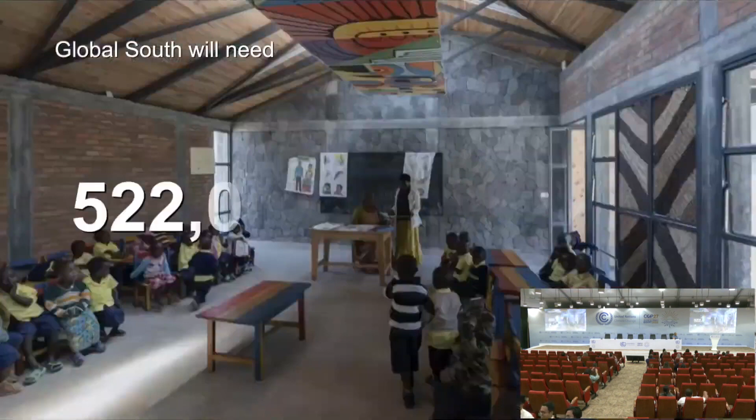In order to meet the needs of this significant population increase, the Global South will need 403 million new housing units, 3.63 million hospital beds, 522,000 new schools, and of course, enough infrastructure to support all of this significant development.

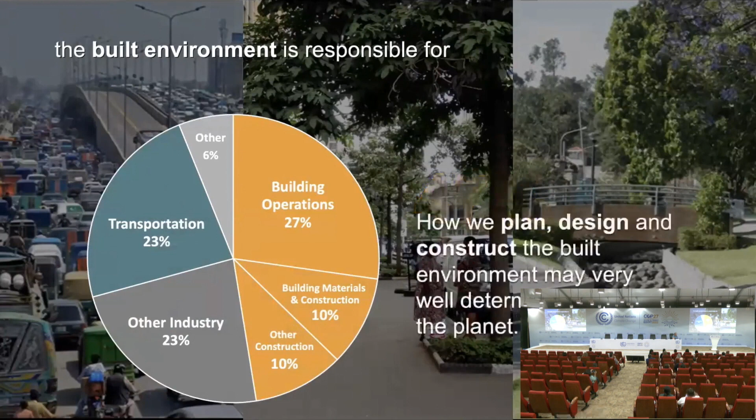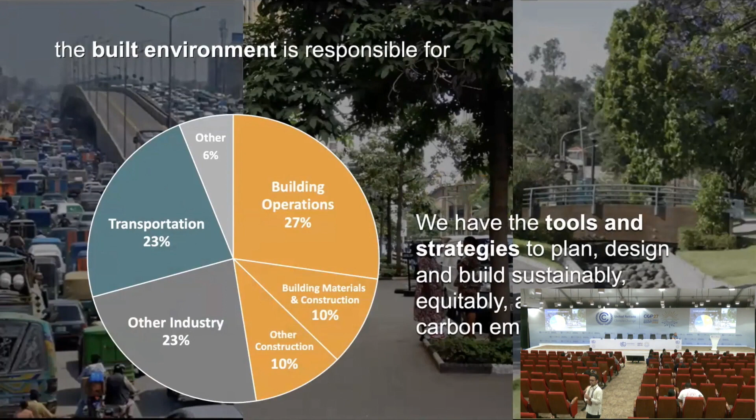Currently, the built environment is responsible for nearly 50% of total global annual emissions. So how we plan, design, and construct the built environment may very well determine the fate of the planet. But we have the tools and strategies to plan, design, and build sustainably, equitably, and with zero carbon emissions today. With that, I'm going to pass it to Ed to tell you how we're going to achieve this.

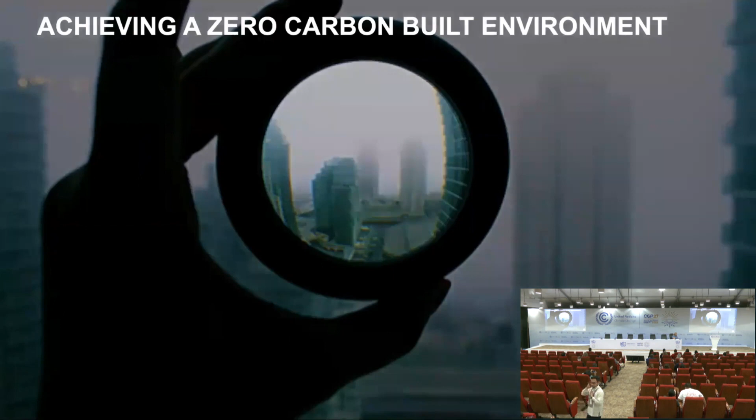That's everything from growth boundaries in urban areas to transit development, to walkable communities, urban agriculture, everything down to the building scale, the form of a building, where you put the glass, how you shade the glass, the materials we make the building out of, the construction types, passive heating, cooling, and daylighting strategies. All of that will get us 70 to 80% of the way to zero carbon.

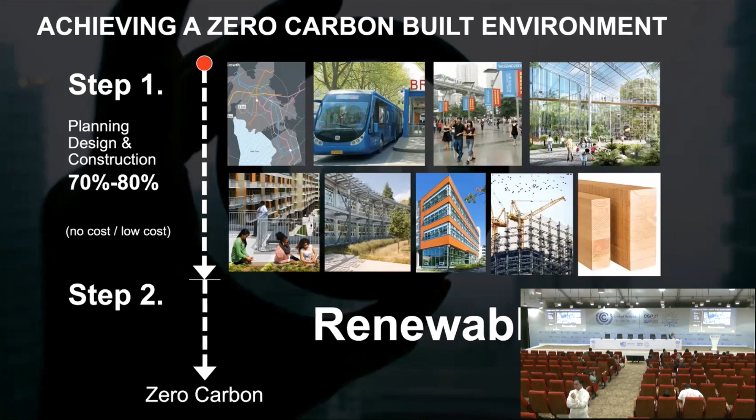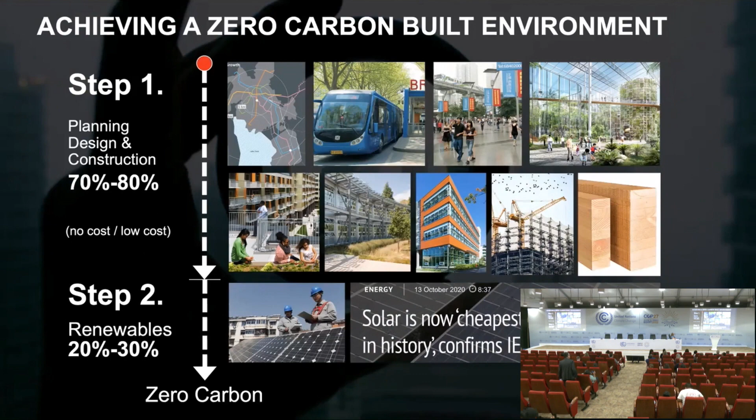And then to get the other 20 to 30%, we add renewables, everything from on-site solar to utility scale solar, wind, hydro, and geothermal. And we know now that solar is the cheapest electricity in history. That's confirmed by the International Energy Agency.

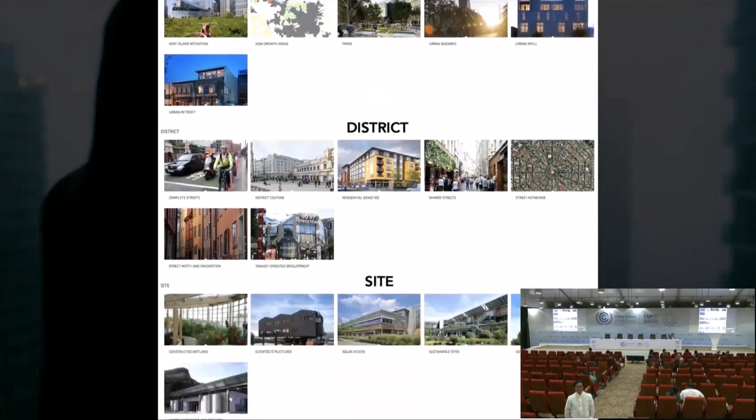All of the strategies to get to the 70 to 80% reduction are contained within the 2030 Palette. You can find it online at 2030palette.org. It's a free program, covering everything from regional strategies, cities and towns, district strategies, site and site development strategies, all the way to building design and building construction material strategies.

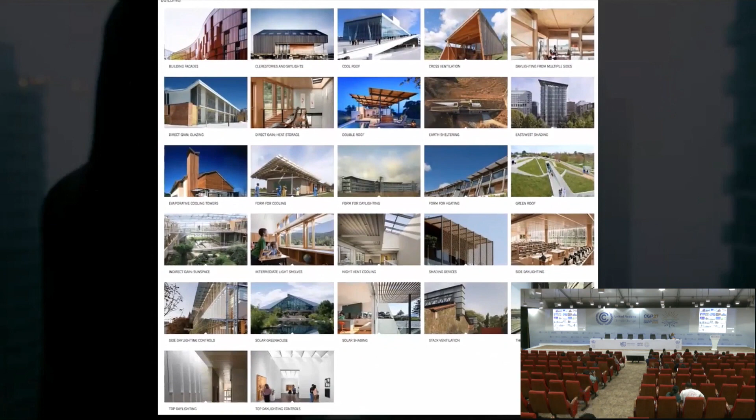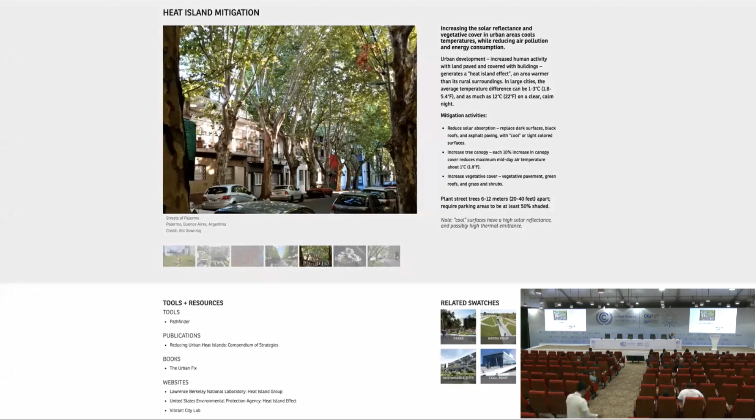You can find that all at 2030palette.org, and it's free. Here's one strategy, for example, heat island mitigation. You can see there are tools and resources, with links to these tools and resources. And there's also in every strategy a rule of thumb. So in this case, if we want to reduce the heat island effect, if we increase the canopy in an urban district by 10%, we can reduce the midday maximum temperature by 1 degree C. It has all sorts of other strategies for heat island mitigation.

This one is transit-oriented development, for example. How do we develop for public transit? Well, we could establish transit-oriented development. We can establish those stops within 400 to 800 meters walking distance within an area, so that you increase the ridership on public transit, and this way make it financially viable.

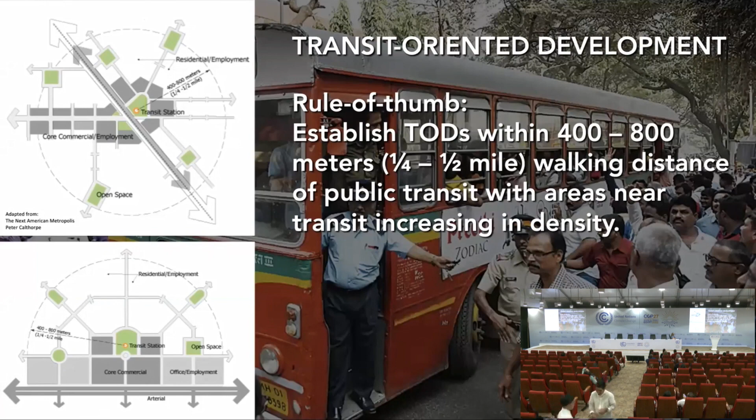Other strategies, for example, at the building scale: what is the optimum form for daylighting a space so we don't need any lights on during the daytime, especially in day use facilities? Well, the rule of thumb is 4.5 to 9 meters. That's how much daylight you can throw from a window on an outside wall into a space, and you can do it from both sides. The 4.5 meters is for task daylighting, and the other 4.5 further inside the building is for ambient daylighting. Here you can see task lighting from both sides.

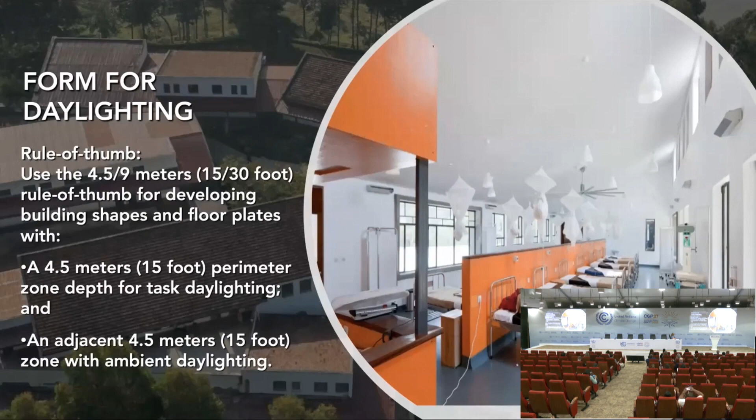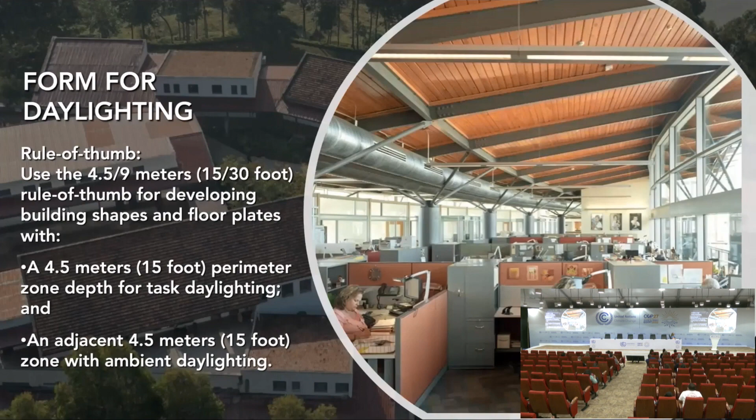This is a 9-meter wide floor plate, and you can see beautiful daylighting in this hospital in the global south. Here you can see a much wider floor plate, probably 18 meters, with 4.5 meters from each side for task daylighting—that's where you're working and doing other things. For circulation and storage, the other 4.5 meters coming in from both sides behind that is for ambient daylighting. So you can create a wider floor plate. That's the guideline, the rule of thumb for daylighting design.

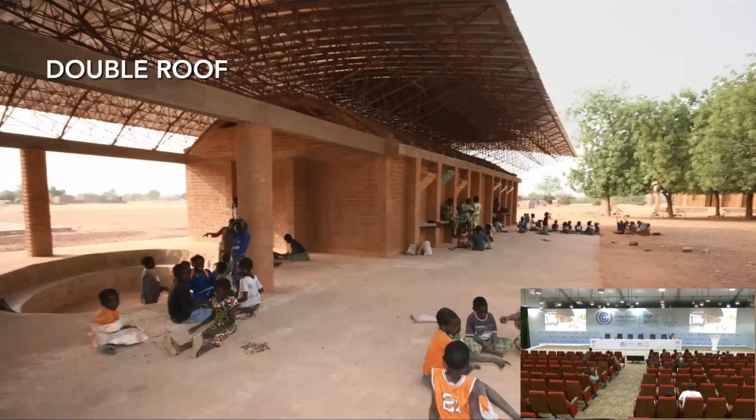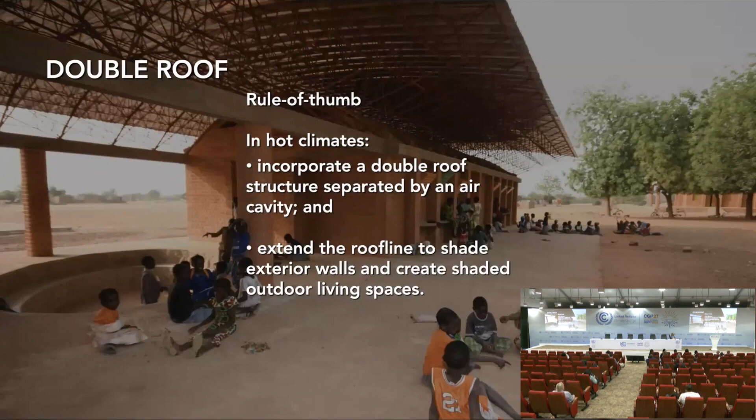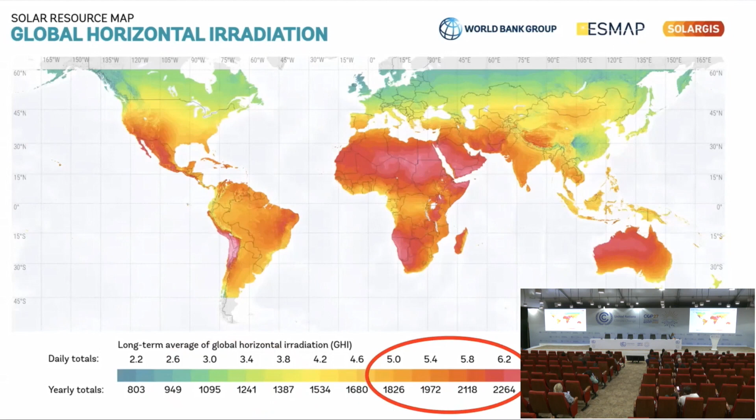Solar energy is distributed free to every place on the planet. You don't have to dig anything up, clean it, transport it, or build facilities to burn it—it's solar energy distributed free to every square meter on the planet. In the global north, it's roughly 2.6 to 3.8 kilowatt hours per square meter—that's how much energy you get on a daily average basis. But look at the global south: it's 5 to 6.2 kilowatt hours per square meter, almost double the amount of free energy you get compared to the global north. So it makes sense to use that energy. We could say that the richest places in terms of free energy distribution are in the global south.

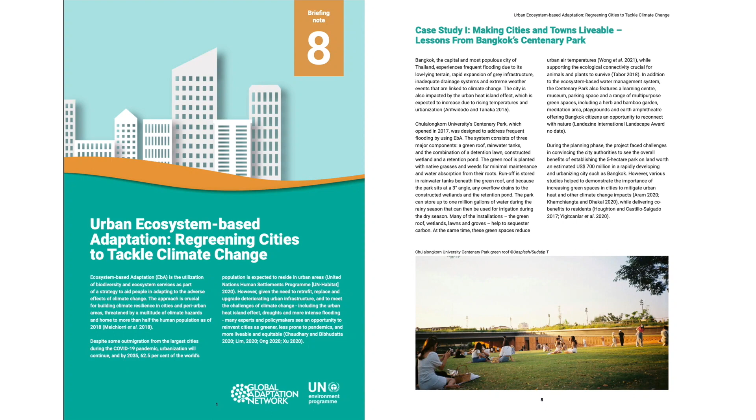And I'm very glad that one of my parks from the Global South, from Bangkok, was listed by UNEP as a case study of making city and town livable, lesson from Bangkok, and actually a case study for many cities around the globe.

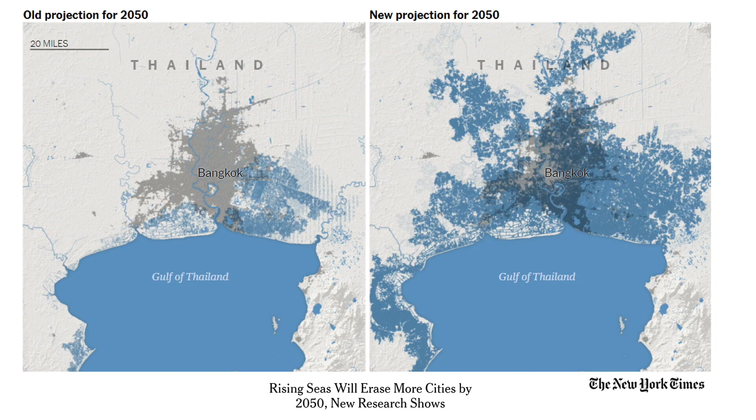This is Bangkok. This is the impact from 2050 - 10 years ago, but this is a recent one. So the impact of climate change really makes us understand differently how we understand climate change.

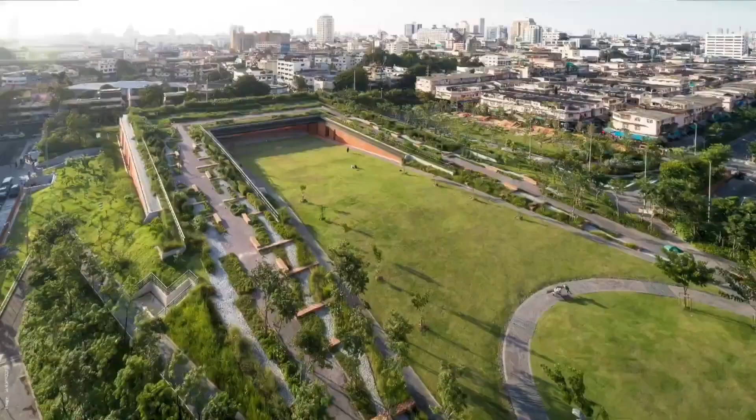So this is the park influenced from the climate situation in Thailand, and it's actually really simple. With the nature-based solution, we just incline a flat city and collect every drop of rain. And with the green roof, wetland, detention pond, and you can name it, with native plants. This is actually nature-based solution.

You have to learn from nature, and nature itself will figure out. I'm very honored that Mr. Antonio Guterres - of course, number one here at COP, every COP - actually went to the park and gave big support to this Global South solution.

It also benefits people, and I'm sure that when you include architects, engineers - don't forget us, landscape architects - we actually can implement things better. The role of us in mitigation, and we've only been taught through adaptation. But when we heard about...

politicians talking about planting a million trees, let's plant a lot - but it's actually destroyed so many things. Maybe it's good in the beginning, but these plants soak up so much water that many of the solutions can actually create more problems in the future. And we name it as nature-based solution.

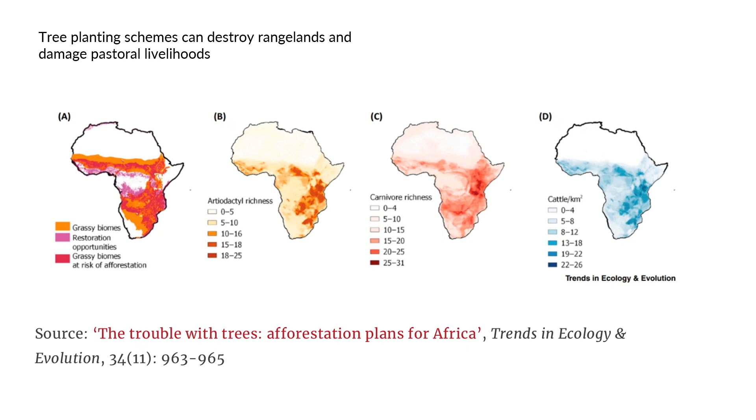This is another report on the trouble of tree afforestation in Africa. So we have to be very specific because we work with ecosystems. We're not working only about quantity - we work on the quality of how things should be. So landscape architecture, integrative mitigation and adaptation - that's what we need for the Global South.

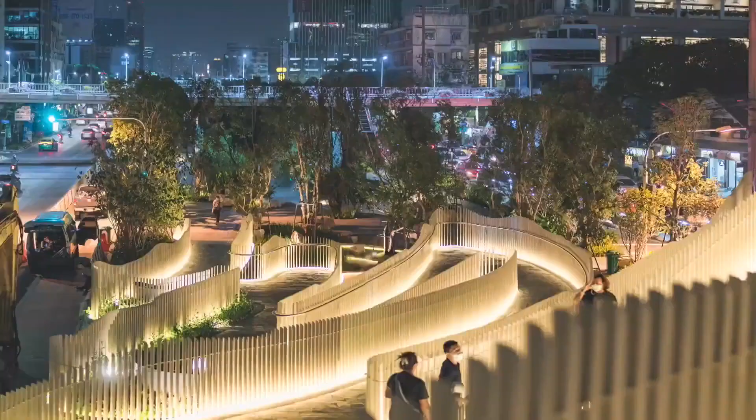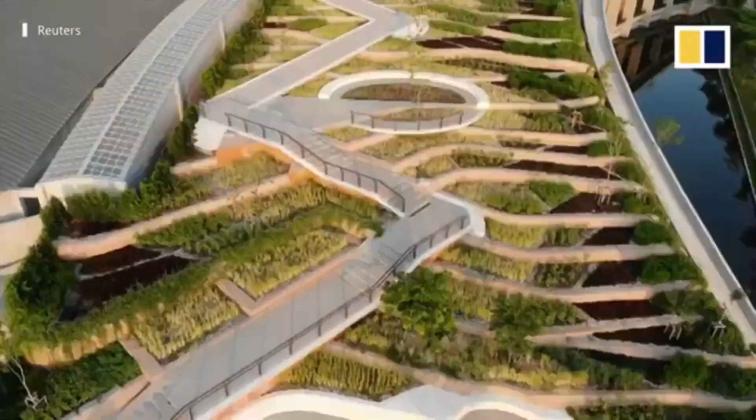Urban heat island - we actually come from a tropical country. You'd think we're very used to heat, but actually all this heat is increasing the use of energy in the building if you don't think through the landscape as well. This is the work I'm doing with the engineers and architects to come up with the biggest rooftop in Asia, and it's actually coming from the local knowledge of rice terraces.

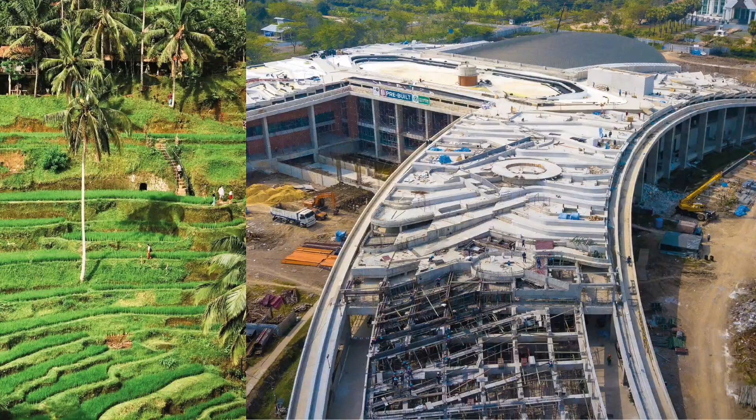We can motivate more ideas from local wisdom - how we as humans used to live with nature harmoniously - and put that together with technology, and we're better off with a new space, new place, new solution.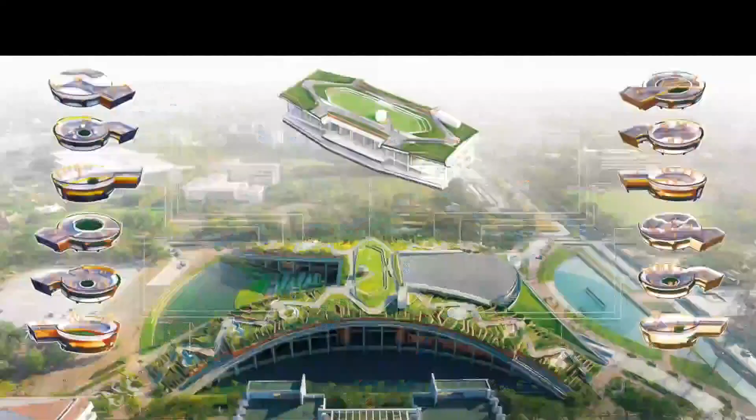We need a new solution, and that's how, together with Architecture 2030, we need new innovation. Solar roof from this building pumps up the water, slows down the runoff 20 times, and gives us organic food all year round - and also a case study for a younger generation.

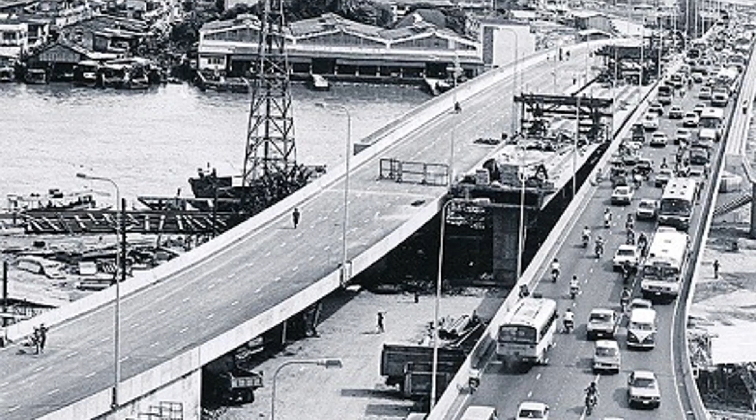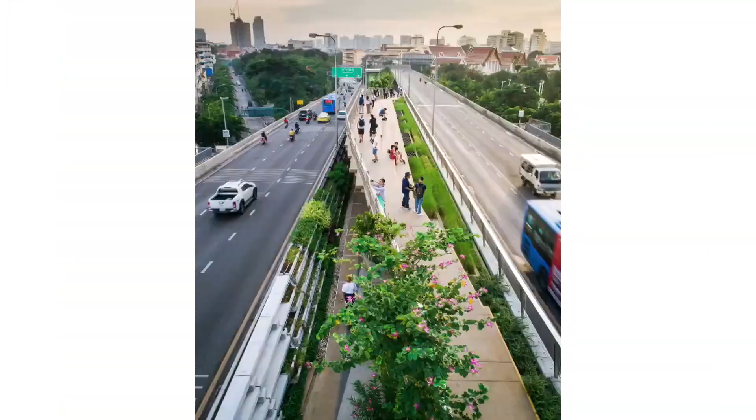How many roofs can turn into a healing garden, food source - and this is like what the first speaker mentioned, we cannot build new all the time. This is an existing infrastructure in the city for 40 years. So we actually put it into the pedestrian bridge, the park bridge across the river, and it's actually become a new landmark for Bangkok.

So not just one benefit, but nature-based solutions, landscape architecture solutions can benefit many aspects of people's lifestyle. But the most important thing is nature-based solutions cannot happen without people. We cannot just work from our office - we need to talk to those who are on the front line. Our work in Bangkok also involves working with informal settlements.

This is people from Lat Phrao Canal, which floods really heavily. When it floods, this is the lowest part of the whole of Bangkok, and the water from the whole city actually goes to their community on its way to the river.

So we need to work with them, talk to them. And this is another case study. We're working with the local government, learning the flood. This is nature flood—people need to move.

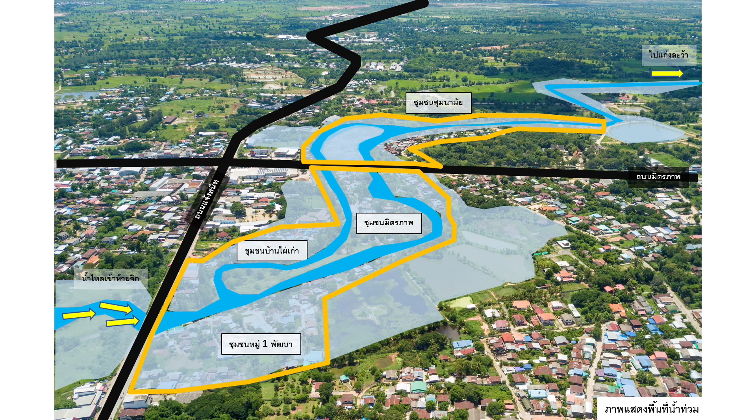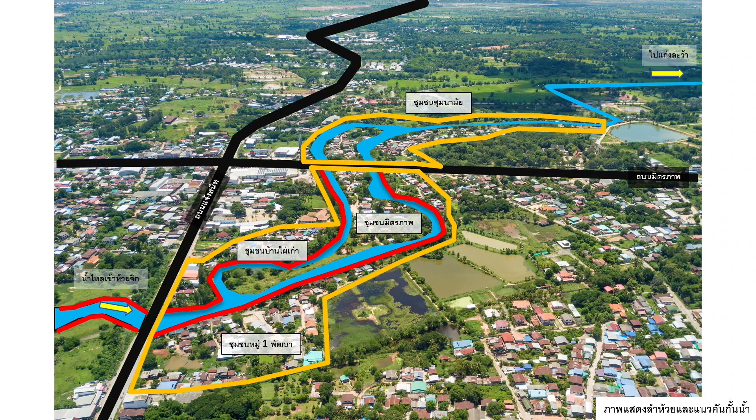Lots of money, maybe from Green Climate Fund or GCF, goes to Thailand, but they actually end up building more dams. The red line is the line of the dam. The whole water is going to have an amount of flood, so it's going to flood more to the next community.

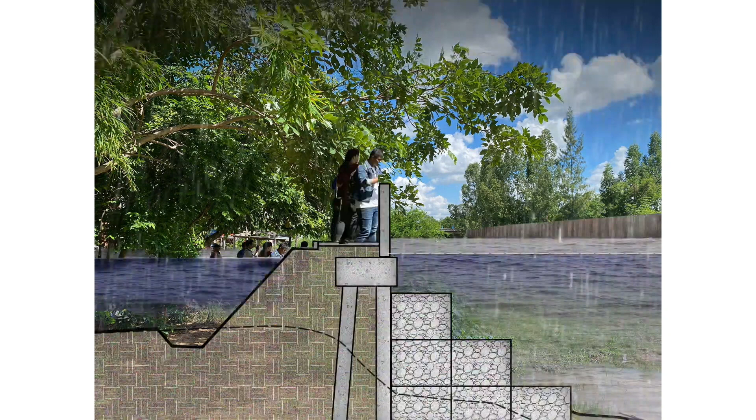So why do we need to build a dam? It's going to flood ourselves. This is how we show, as a landscape architect, the before and after impact when you change nature, when you're not working with nature. This is how the lifestyle is going to be. It's going to flood in front of the dam, flood behind the dam, and the lifestyle would change for the people of the global south.

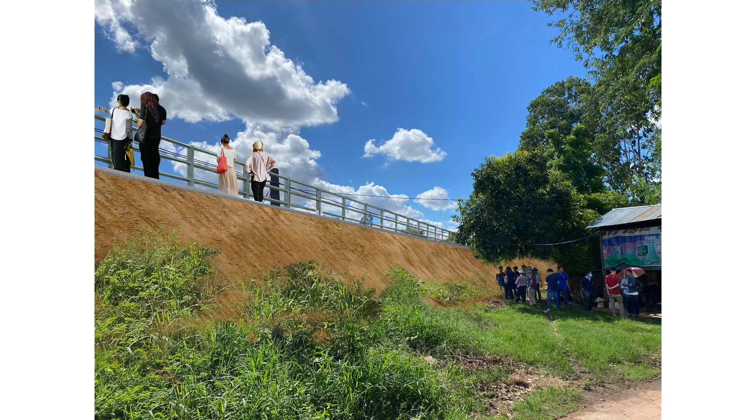You fish, you walk across to pick vegetables from your neighbor. You can't do that anymore because we're so afraid to get wet. This is coming from the fear-based solution, not the nature-based solution, which is what we are working on right now.

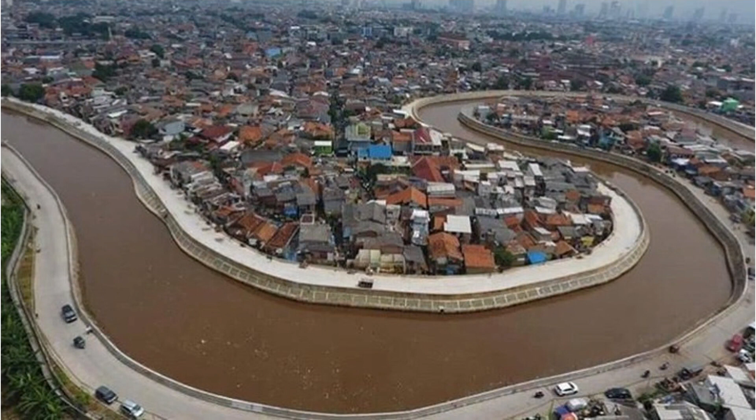And this is the picture from the canal in Indonesia. Some politicians will say, oh, this is such a perfect, beautiful landscape architecture of a canal. No, this is like we are killing the canal, killing our river, not letting it move.

So working with landscape architects is needed so much to save cities in the global south. Engineers can do so much with the landscape. Working together, we come up with green infrastructure. And this is where my region belongs.

This is how we're going to flood soon, with sea level rise and saltwater intrusion. And I need to move sometime soon—according to the New York Times, maybe in 10 years or 30 years.

So I would actually like us to have a seat, a voice, as built environment designers—engineers, urban designers, landscape architects—working together with policymakers and finance people, all of us coming up with the right solution. Because the solutions we invest in are multi-million dollar projects, and those projects can't just be short-term solutions. We should create a future solution for the next generation to come.

Plant more trees rather than buy an air purifier for your PM 2.5. Plant more trees rather than just saying, okay, I don't want to get wet, let's build a higher dam, and a higher dam, and a higher dam. So that's my take as a landscape architect, as a representative of IFLA and many landscape organizations around the world. Thank you, and let's work together.

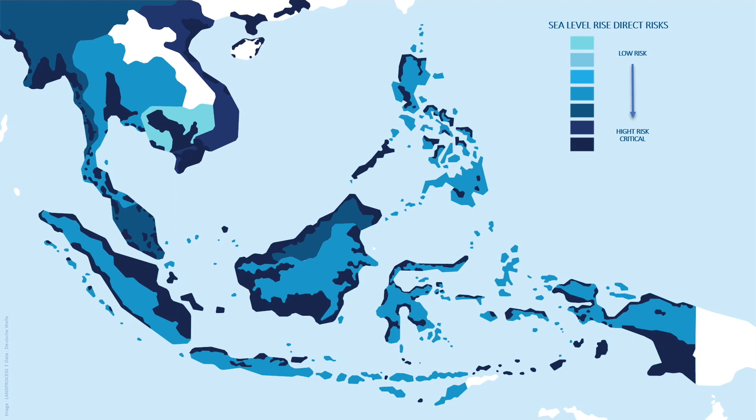Thank you, Kotch. That call to collaborate is something I think all of you are addressing—that will be a great thing to talk about at the end of the panel. Thank you.

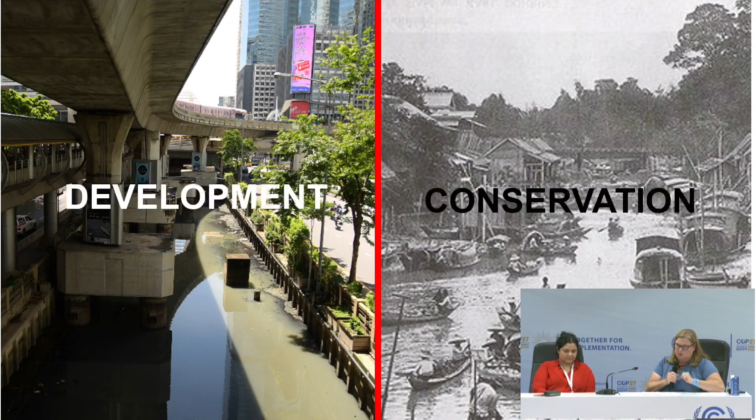It's my great pleasure to introduce our next speaker. Imen Makhlouf is a civil engineer from Tunisia with 20 years of experience in transportation and energy infrastructure across Africa. She believes her role as a human is to serve in her capacity as an engineer, and she wants to bring greater attention to climate challenges in the infrastructure design field. She is joining us as a delegate of the International Network of Women Engineers and Scientists, and she's personally an outspoken advocate for gender equality and empowerment of women. She says her superpower is empathy, and that's the tool she uses to fully understand the problems her work is addressing.

Thank you, Imen. And do you have the clicker?

Thank you, Lisa, for the introduction. Good presentations, my colleagues Ghaith and Kotchakorn. So I'm going to present and talk about infrastructure facing climate change. But before going to my presentation, I want to introduce my three friends.

Fatimata—she's 12 years old, from Comoros Island. In 2019, a cyclone destroyed her school. Kayla—she's from Gabon, 6 years old. Each day she walks more than 3 kilometers with her brother to collect water. And Zainab, a Tunisian girl, 10 years old. She lives in a rural area where flooding destroyed most of it.

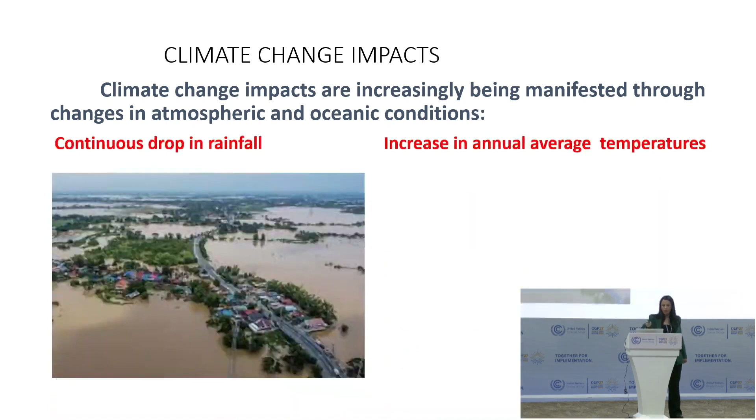Climate change impacts are increasingly being manifested through changes in atmospheric and ocean conditions: continuous drop in rainfall, increase in annual average temperature, but also the upsurge in extreme events - tsunami, cyclones, sea level rise, droughts, floods, landslides, mudslides, rockfalls.

So climate change has significantly impacted and overwhelmed existing infrastructure around the world. And the most impacted are vulnerable populations.

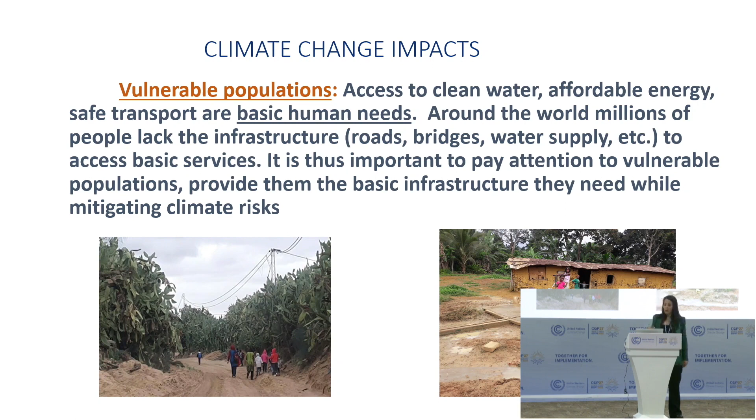Access to clean water, affordable energy, safe transport are basic human needs. Around the world, millions of people lack infrastructure - roads, bridges, water supply - to access basic services. It is thus important to pay attention to vulnerable populations, provide them the basic infrastructure they need while mitigating climate risks.

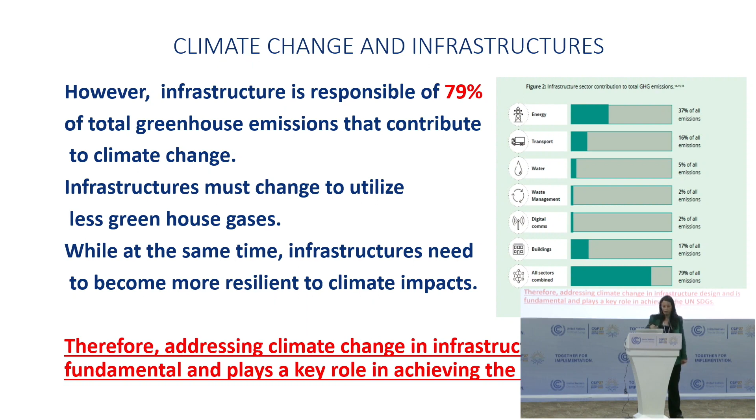However, infrastructure is responsible for 79% of total greenhouse emissions that contribute to climate change. Therefore, infrastructure must change to utilize less greenhouse gases, while at the same time infrastructures need to become more resilient to climate impact. Therefore, addressing climate change in infrastructure design is fundamental and plays a key role in achieving the UN SDGs.

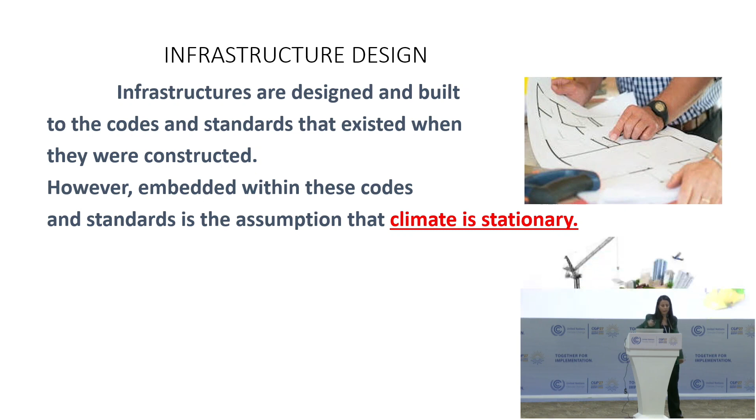Infrastructures are designed and built to the code and standards that existed when they were constructed. However, embedded within these codes and standards is the assumption that climate is stationary. Now, with climate change, infrastructure design requires a reassessment of the relevance of the climate criteria currently being used to design all infrastructure.

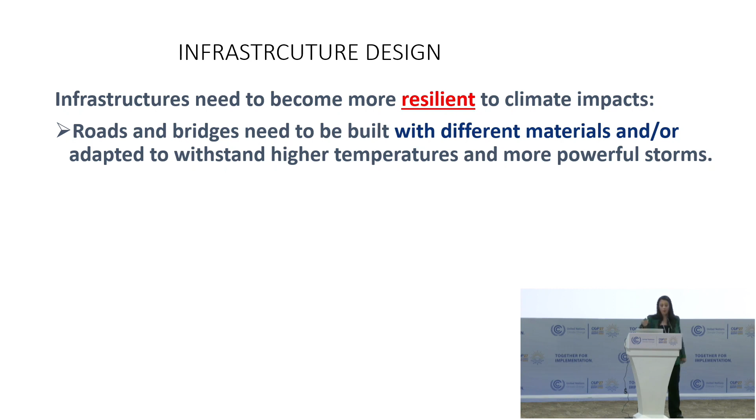Infrastructures need to become more resilient to climate impact. Roads and bridges need to be built with different materials and adapted to withstand higher temperatures and more powerful storms.

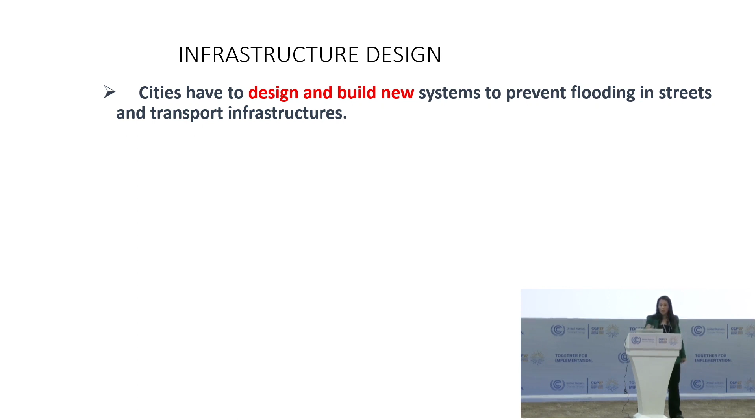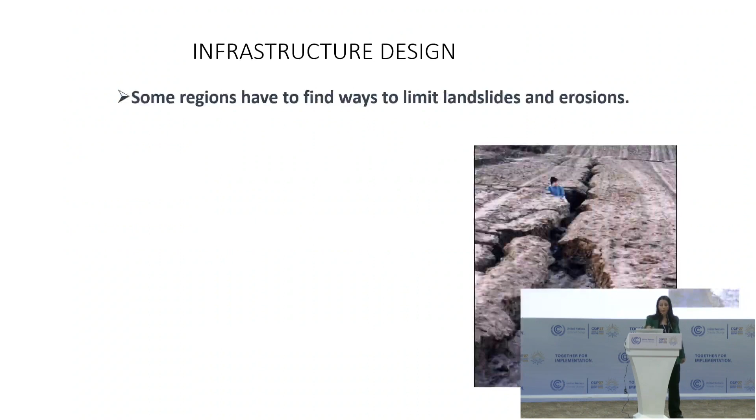Cities have to design and build new systems to prevent flooding in streets and transport infrastructure. Some regions have to find ways to limit landslides and erosions.

What is the role of engineering for climate change? Infrastructure engineers have an important role in addressing climate change and supporting climate-compatible development, in proposing nature-based solutions to address both mitigation and adaptation to climate change.

Design infrastructure with consideration to impacts on the environment, climate, and respecting sustainable development goals. Adopt more regenerative design principles for complete infrastructure systems that match the goal of becoming net zero economies by 2050.

Existing norms must be revised to prepare engineers for the change required to address the impacts of climate change on infrastructure. Develop an early warning system for disasters.

Utilize engineering to enhance disaster preparedness for effective response and to build infrastructure after recovery. We need more diversity of engineers with different skills, backgrounds, and culture.

In conclusion, it is possible to design and construct fully functional infrastructure that is ecologically responsive, integrating natural materials, green plants, and resource efficiency. We all have a role to play in building a more sustainable and equitable world.

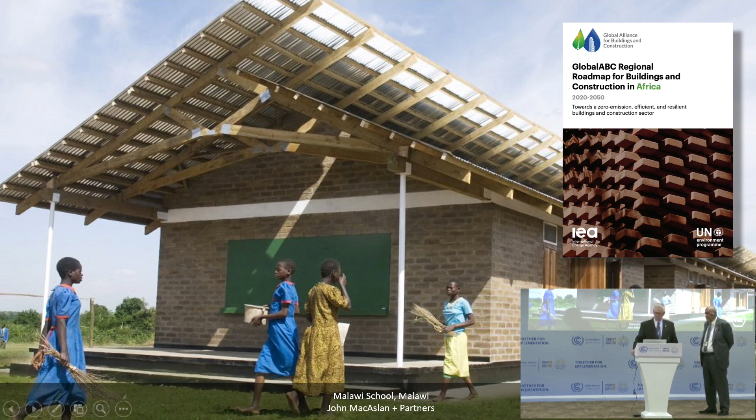We also are working with the Global Clean Energy Forum, which includes 31 ministries in the Global South, to share strategies and transfer technology. And finally, our International Standards Task Force is working to maximize the international impacts of our standards.

And then last for me, before I turn it back over - Farooq and I have been holding, with our board of directors and our leadership, global summits and industry roundtables around the world throughout this year to develop roadmaps and action plans to support a healthy and sustainable indoor environment across the planet.

And lastly, we've just built a new headquarters - or actually we renovated a 1974 building. Again, using some technologies that Ghaith mentioned, to build less and not to build if we don't need to. So we proved we could take a '74 building and turn it into net zero energy, and we're going through our Scope 1, Scope 2, and Scope 3 audits right now, hoping to be the first nonprofit organization to certify a net zero carbon emissions building here soon.

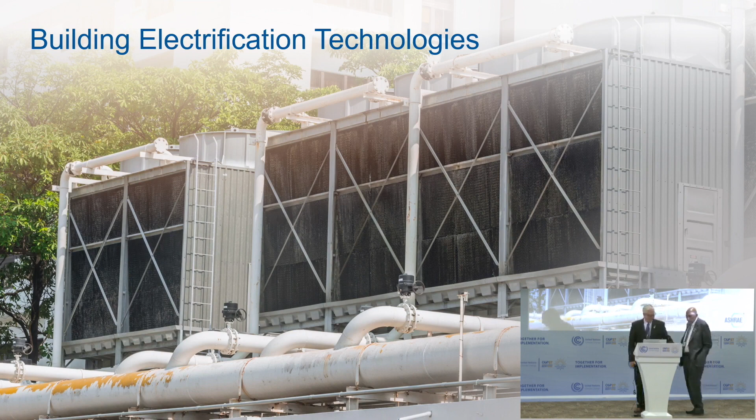Thank you. Farooq? So, the last 30 seconds.

ASHRAE is working to partner with, we're in discussions with the government of the UAE to develop an air conditioning solution which is based on solar heat and uses no water. And if that solution comes about, it'll be a game changer, because it'll take away the factors of the shortage of electricity, the need to build power plants and emit carbon - take solar heat, turn it into air conditioning. So innovative systems and technology is the forte of ASHRAE.

Thank you very much.

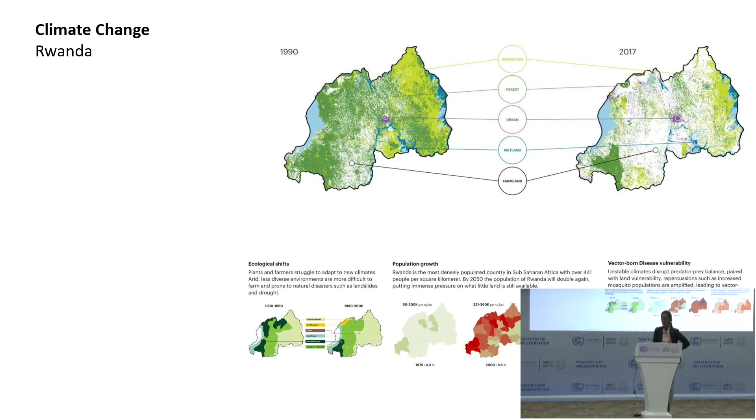We started by looking at the challenges Rwanda is facing that RICA can try to solve. Population growth and climate change are putting immense pressure on the land we have. Rwanda is the most densely populated country in Sub-Saharan Africa, especially because it's small, and by 2050 the population will double to about 25 million, meaning more people to feed and less land to farm. Climate change is also leading to long periods of droughts and heavy rains that damage infrastructure. The campus is located in the east of Rwanda, one of the hottest and most arid areas. It's about 1,500 hectares, with about 69 buildings on about 150 hectares of land. It's also home to the woodland savanna forest, one of only two in Rwanda. The campus was designed on the principles of conservation, agriculture, and One Health.

The mission of the campus, working closely with our partners, the government of Rwanda, RICA, and the Howard Buffett Foundation, is to train the next generation of leaders in conservation agriculture to attain healthy and sustainable food independence in Rwanda. Every decision we made in terms of design and construction had to reinforce this mission. So we asked ourselves, how can we balance One Health, low embodied carbon, and carbon positivity? Being such a big site, we were particularly thinking about how we could place our buildings by using the land to the best of our ability. As mentioned, we left the savanna forest intact.

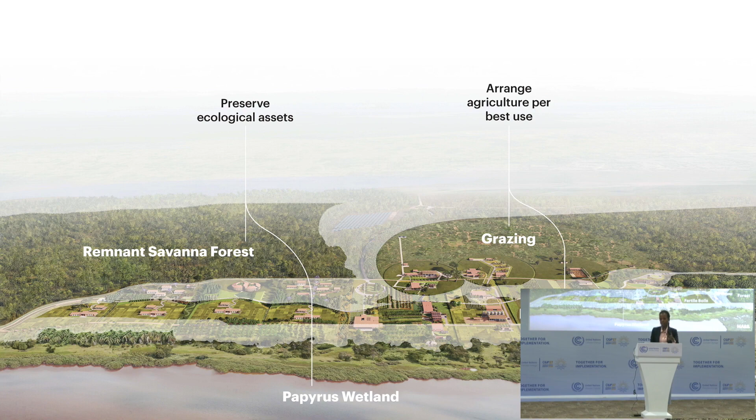This campus had also been home to an agricultural facility for many years, meaning we placed our buildings on already disturbed soil. So we have our first-year housing and first-year farms and agriculture-based enterprises close to fertile soil, and our animal enterprises located on slopes and soils that were best for livestock. The government of Rwanda wanted about 80% of students graduating here to become entrepreneurs, coming up with co-ops to influence agriculture in Rwanda and internationally. So it's super hands-on. The first-year farmers will experience the life of a typical farmer in Rwanda, using traditional ways to farm. As they move into their second and third year, they'll learn about agricultural value-add, from raw harvest to processing and sale.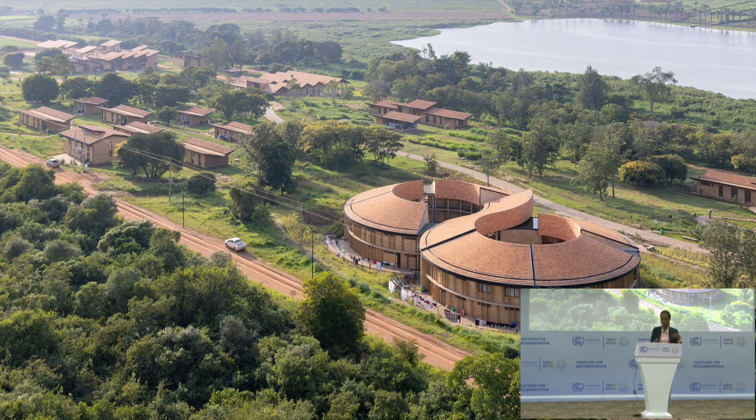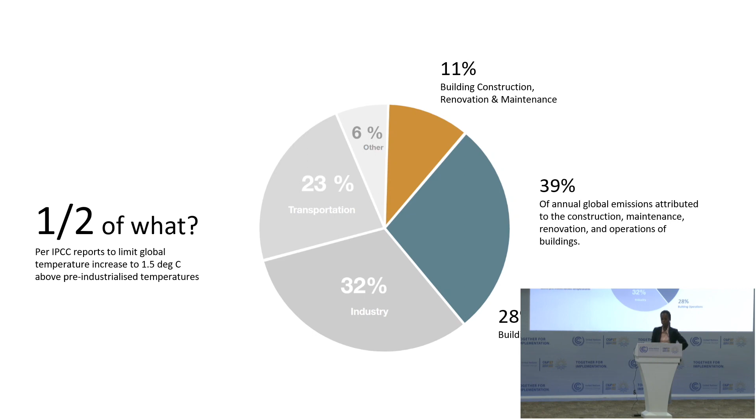As we know, the building industry is the biggest contributor to greenhouse gas emissions. And per IPCC, in order to limit our temperature increase to 1.5 degrees, we need to halve our emissions for both operations and construction.

So the campus was designed on the principles of low energy and passive design. All buildings are naturally ventilated, naturally lit, really taking advantage of the good climate of Rwanda. It's also 100% off-grid, with a 4-hectare solar farm feeding the whole campus, and we extract lake water, treat it, and use it in the campus for both potable and unpotable water.

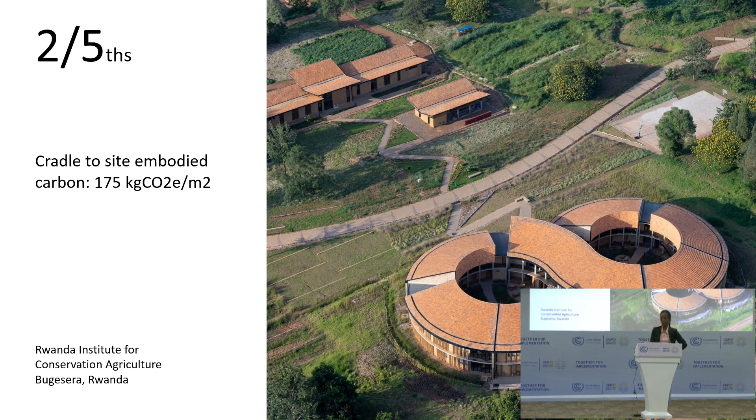For this campus, talking about materials, we intentionally wanted to reduce the embodied carbon of all the buildings, and we achieved 2/5 compared to global institutional buildings of the same type. So RICA is actually towards half that is required per IPCC. And I want to show you how it was achieved.

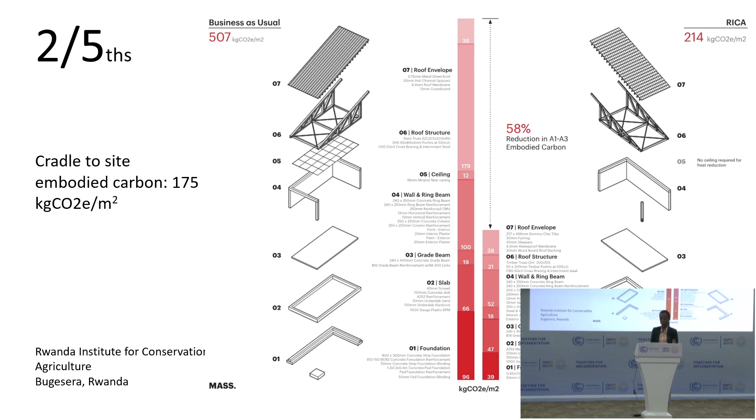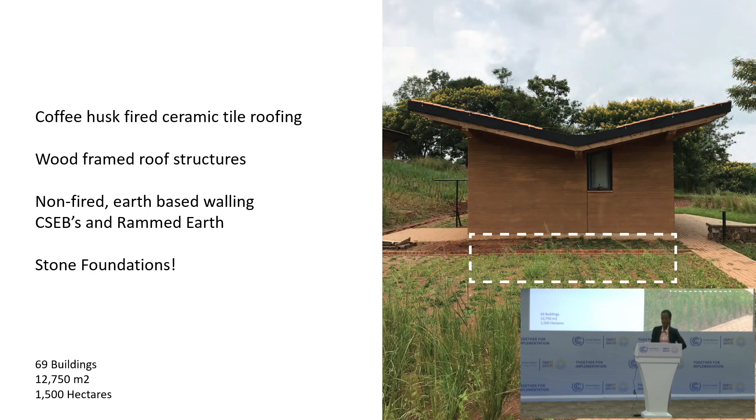On my left you have business as usual, and what we did at RICA, where we really measured all the materials we used. Instead of using a steel roof structure, we used a timber roof structure. All our walls are non-fired earth walls, rammed earth and CSEBs, and a stone foundation instead of a concrete strip foundation. This is a typical representation of all the buildings at RICA: stone foundations, non-fired earth-based walling, compressed stabilized earth blocks and rammed earth, a wood frame roof structure, and terracotta tile roofing.

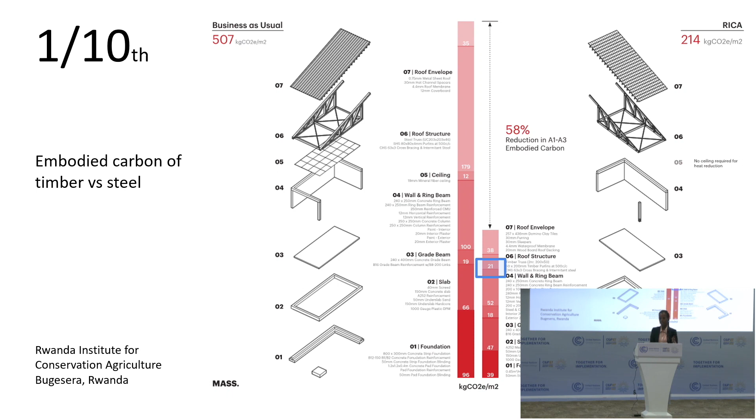Briefly about timber: we use it for all our roof structures and some of the columns. The timber really guided the shapes of our buildings, where you can see here we have the sawtooth - I will show you the butterfly after. Because we insisted on the workmanship, we did not need any ceiling, reducing the materials we had to use on this campus. We chose timber over steel because timber is 1/10 of the embodied carbon compared to steel, and even the small embodied carbon we had in our timber was for all the steel connections, and this does not include the embodied carbon in the timber in its raw form.

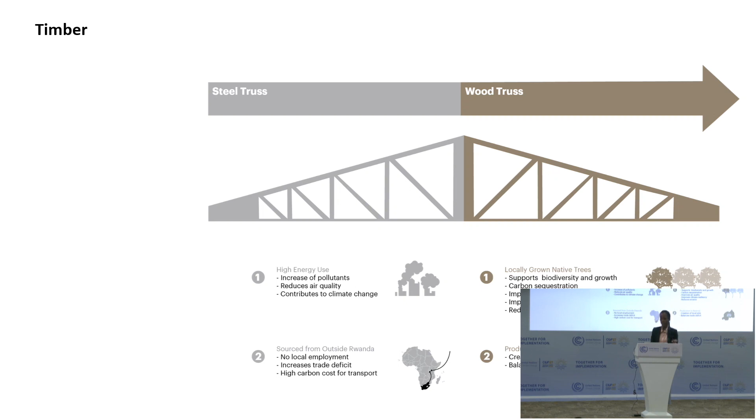We had to compare. As we know, steel is readily available, cheap, fast, and has already proven durability. However, it has a high embodied carbon. And also, if we're choosing steel over timber, we're not supporting the local economy, because all the timber was sourced locally or regionally.

Earth was a big driver because our walls made up 25% of the entire structure of our buildings, so we opted for rammed earth and CSEBs. From our early measurement, we realized that CSEBs are actually half the embodied carbon compared to other walling, but reinforced rammed earth is a little bit higher compared to concrete blocks. So we were intentional about not using rammed earth everywhere, reducing the amount of rammed earth and increasing the amount of CSEBs.

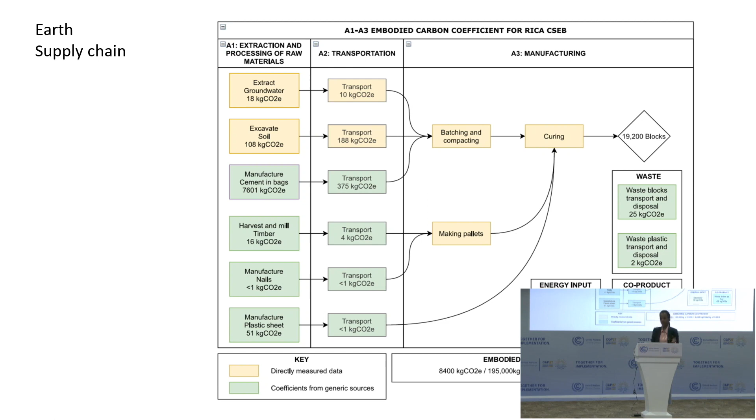The supply chain was also very easy to trace because all the earth was from site, the 1,500 hectare site. It's a long process, but this is the amount of calculation we went through to measure the embodied carbon. And also realize that when you source locally, you can understand the impact you have both on the environment and on the people economically, while if you source far away, you won't really have that impact you want.

All the blocks were manufactured on site as well. We had about 80 blocks manufactured per day, and the only foreign material was cement, which made up only 1/20th of the block made. This was to stabilize the earth blocks.

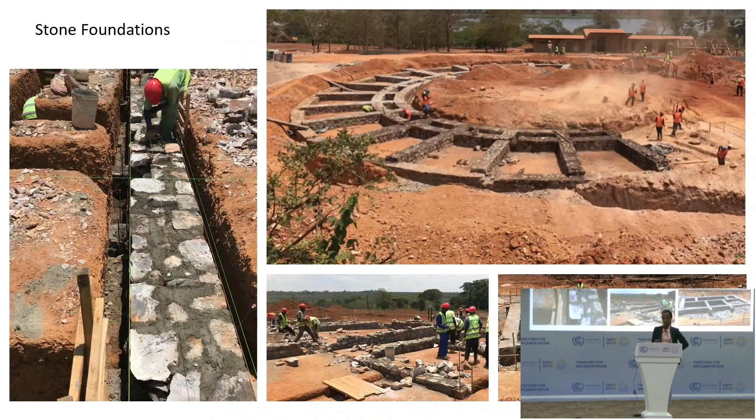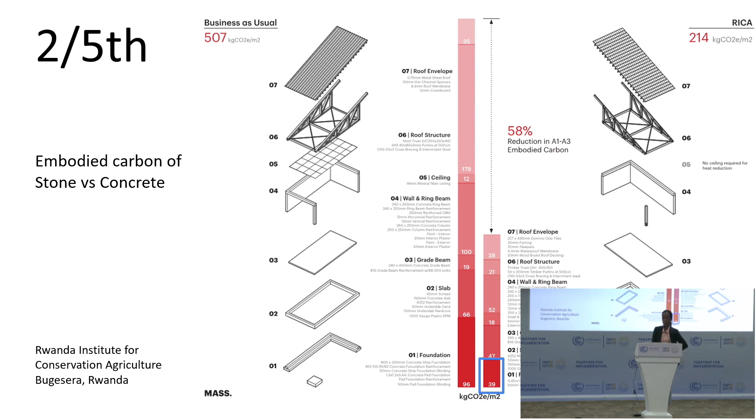Stone foundation again, instead of the typical concrete strip foundation, and we realized that stone is actually 2/5 compared to concrete in terms of embodied carbon. And from what we learned at RICA using non-fired earth, we worked with the government of Rwanda and other institutions to come up with guidance on how to use adobe blocks in the construction industry. Because even though this is a very old technique, we wanted to show that it can be used in a more formalized and safe way, and now it can be used in the whole country.

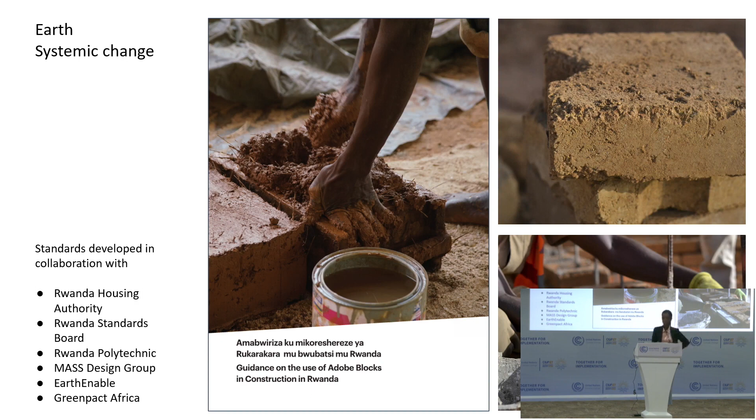We were also fortunate to plant about 40 hectares of native savanna plants on site, and that means the sequestration of the reforestation will make this campus climate positive by 2040. And I will end by saying that it's too late to do less harm. We need to remove what we've been putting in our atmosphere. We need to be regenerative. Thank you.